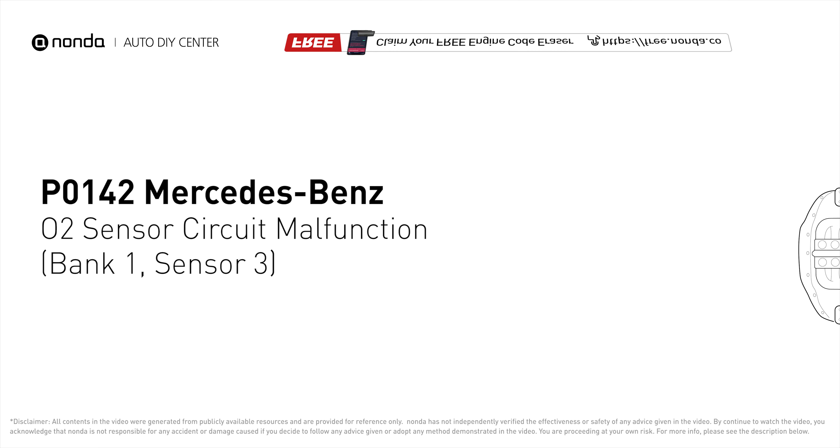Use the ZUS app to scan your vehicle and see the error code P0142. It indicates the oxygen sensor bank 1 sensor 3 fails to meet the minimum and maximum voltage limits calibrated for the ECM. Here are 3 of the most practical solutions to fix Mercedes-Benz's P0142 error code.

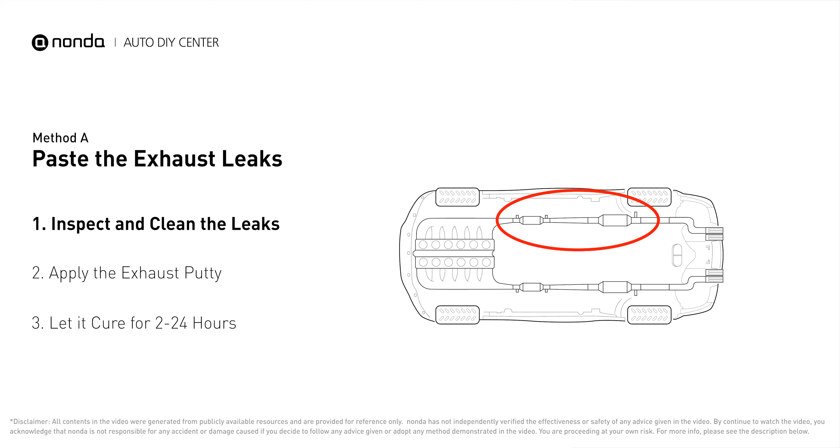Method A. Paste the exhaust leaks. The exhaust system begins at the engine combustion chambers and runs along the undercarriage of the vehicle, eventually ending with the visible tailpipe. If you have a leak around the corner, get some exhaust putty to seal it up. First, get sandpaper and a wet wipe to clean the leaking area for better application.

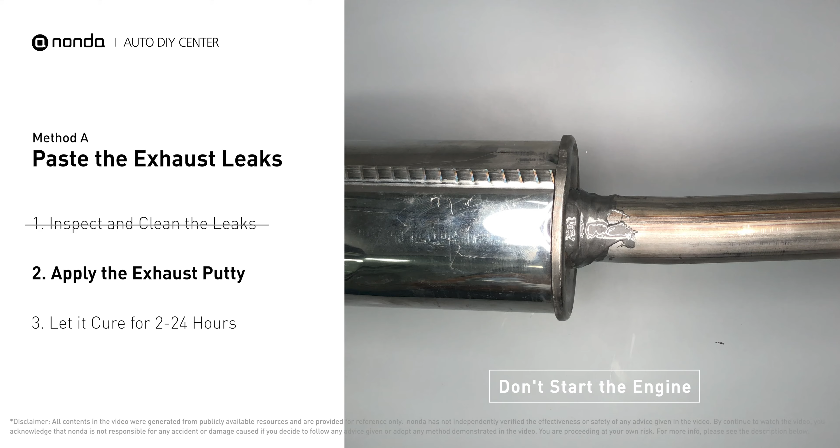Stir the paste well to activate it. Apply and press the paste to seal the leaking area. After the application, don't start the engine because the positive pressure from the exhaust will blow out the paste. Let it cure for 2 to 24 hours, depending on the external temperature. The hotter it is, the quicker it will cure. That means you can use something like a hair dryer to heat it up and make it cure faster.

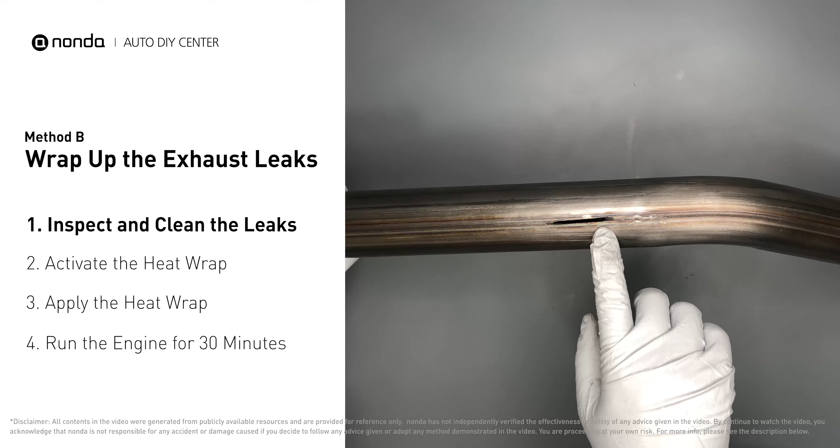Method B. Wrap up the exhaust leaks. Exhaust pipes are made out of rolled steel, and there is a welded seam on them. Like this one, the seam will often rot and leak. First, use sandpaper and a wet wipe to clean the leaking area for better application.

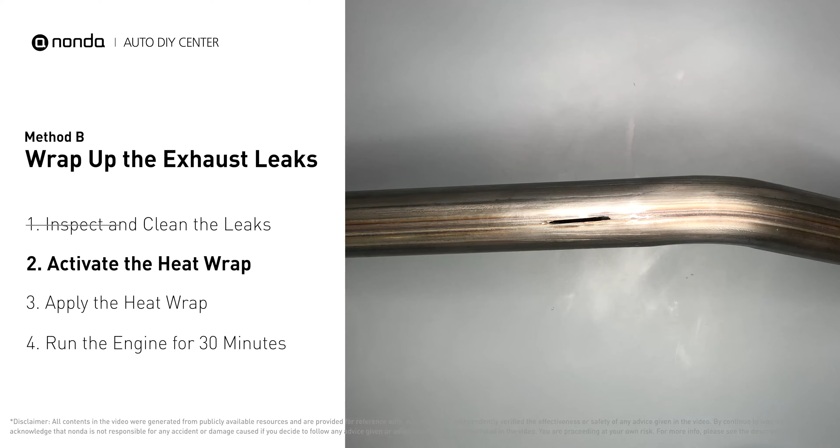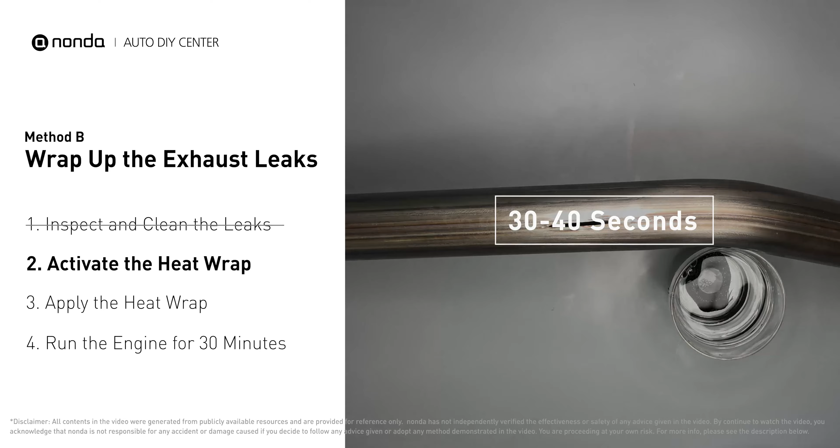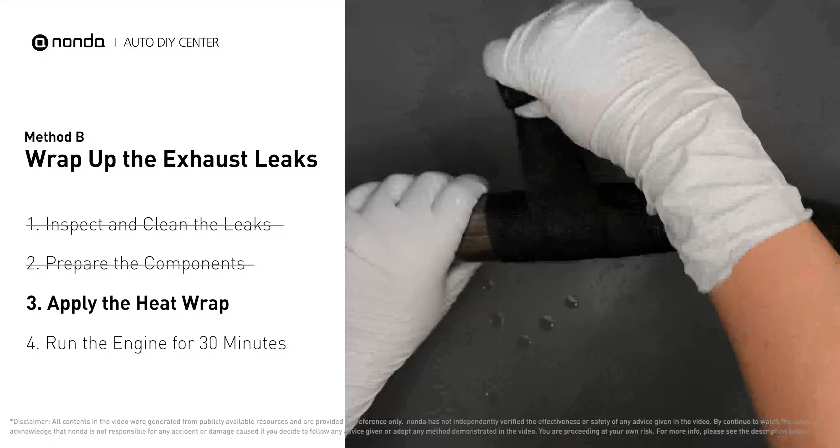Get the heat wrap out and put it in the water for about 30 to 40 seconds to start the activation process. Then, remove it and squeeze out any excess water. Wrap it around the area and overlap it a couple of inches on each side. Repeat the process 3 or 4 times. Then squeeze it to make the resin go all through it. Start the car and let it run for 30 minutes so the heat cures it and makes a permanent fix.

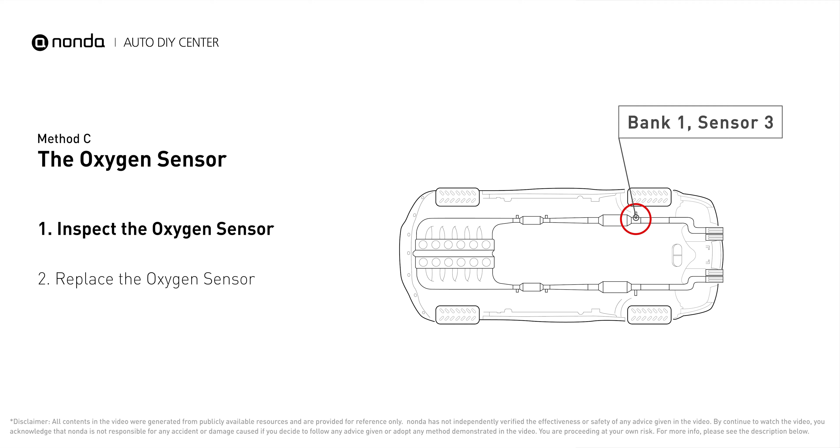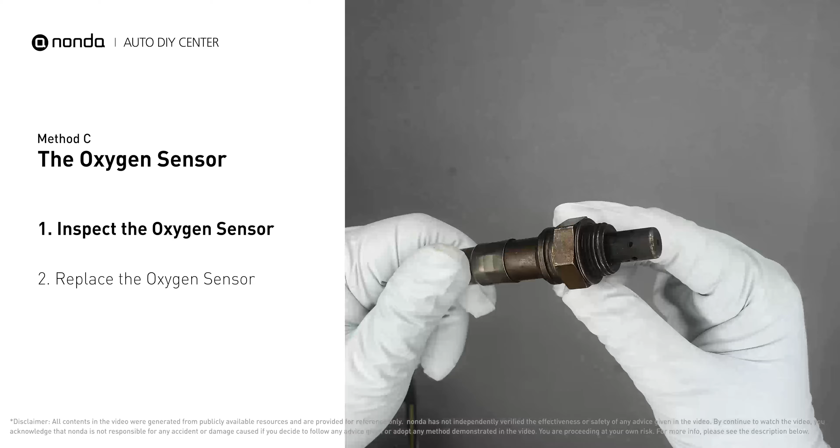Method C. The oxygen sensor. This oxygen sensor is located right after the catalytic converter. Bank 1 is on the side with the cylinder number 1. Sensor number 3 is downstream of the last catalyst in the exhaust system. Visually check the oxygen sensor's electrical connections, wire harness, and metal tabs for any damages. If damages are found, replace the oxygen sensor.

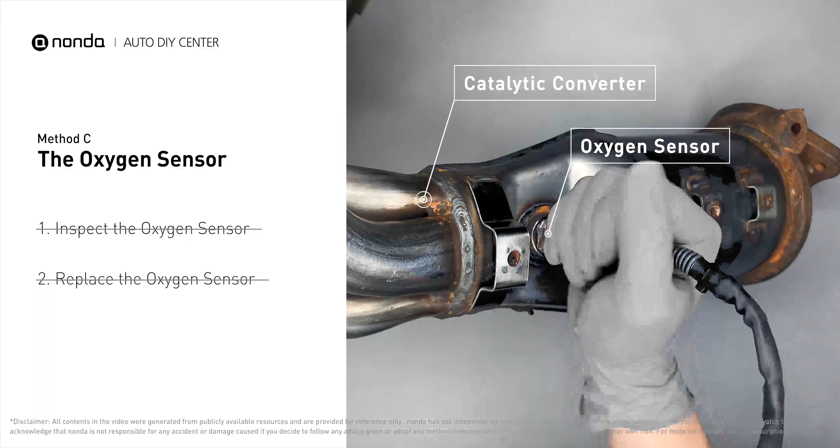So here are 3 of the most practical solutions to fix Mercedes-Benz's P0142 error code. After the repair, you can now use the ZUS app to clear the error code. And tap the rescan button one more time to make sure everything is fine with your vehicle.